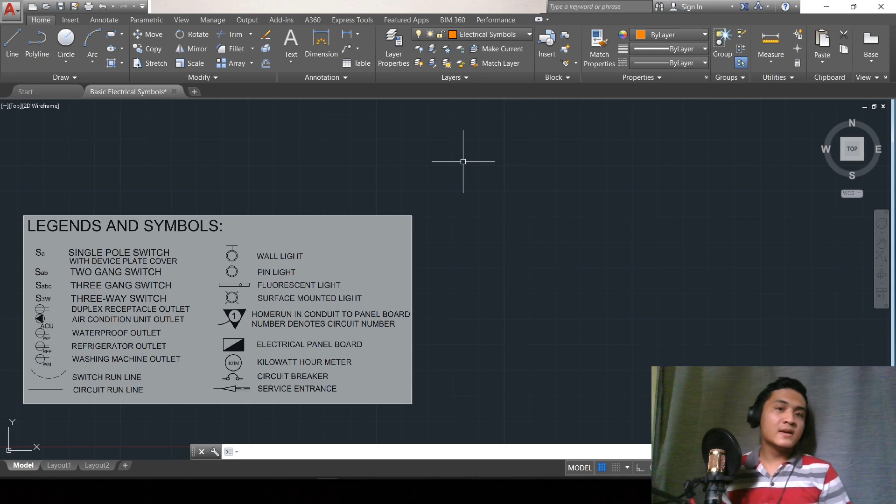In this video we will create basic electrical symbols, as you can see here on our screen. We'll use these symbols to create electrical drawings for our electrical plan. These symbols are my own drawing, so you can use them for your electrical plans if you don't have samples or want to practice making an electrical plan. I'll teach you how to make this from scratch, so let's proceed.

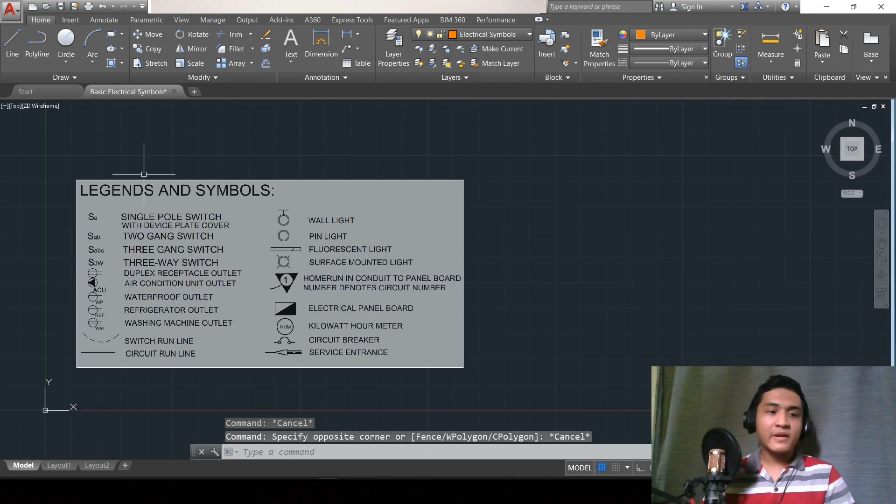Let's proceed with the switches. For the switches, as you can see, the symbol is just text. So for that, I use the text command, or letter T.

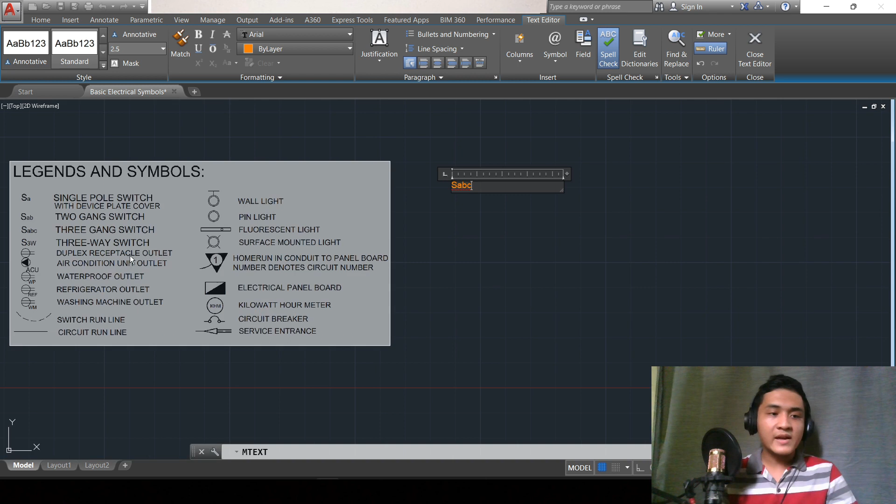Let's click here. The first thing I do is type the capital S, which means switch, then the small letters. We'll use this text for the 3-gang switch. What I do here is select the lowercase text, and after that we change the font size.

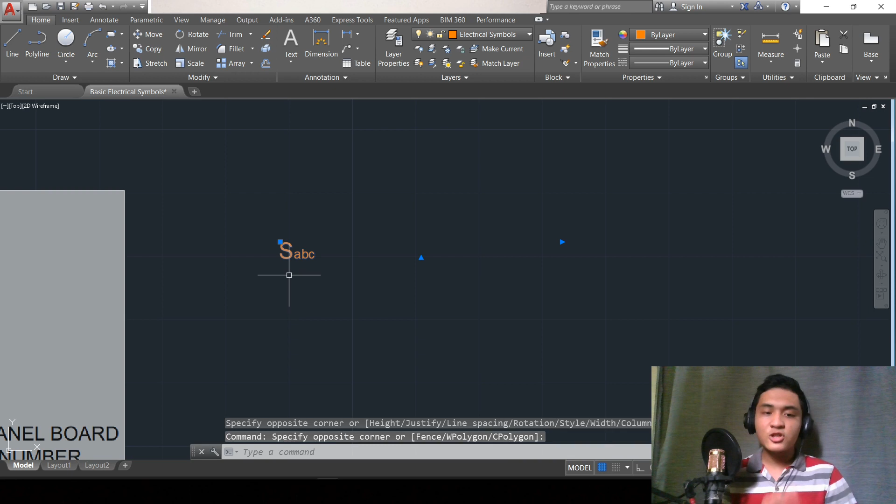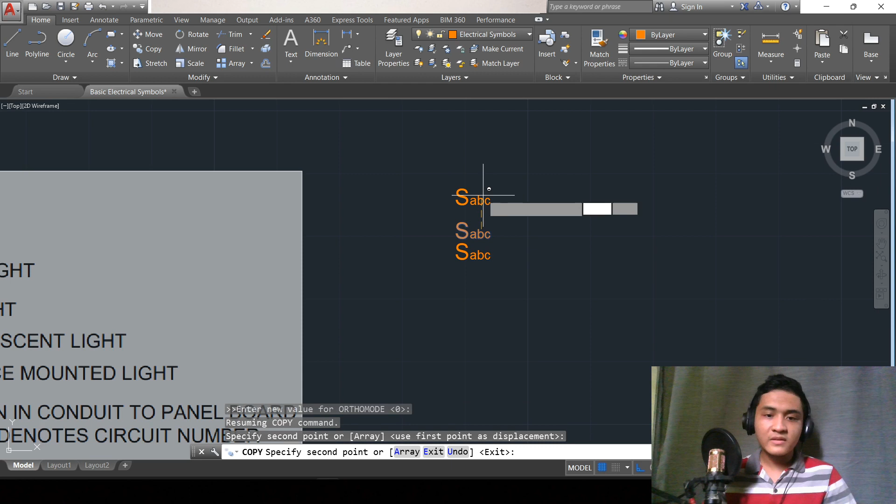When making the other switches, we can just copy this and revise the content of our switches for a while. So let's copy it, and by that let's proceed to the other switches.

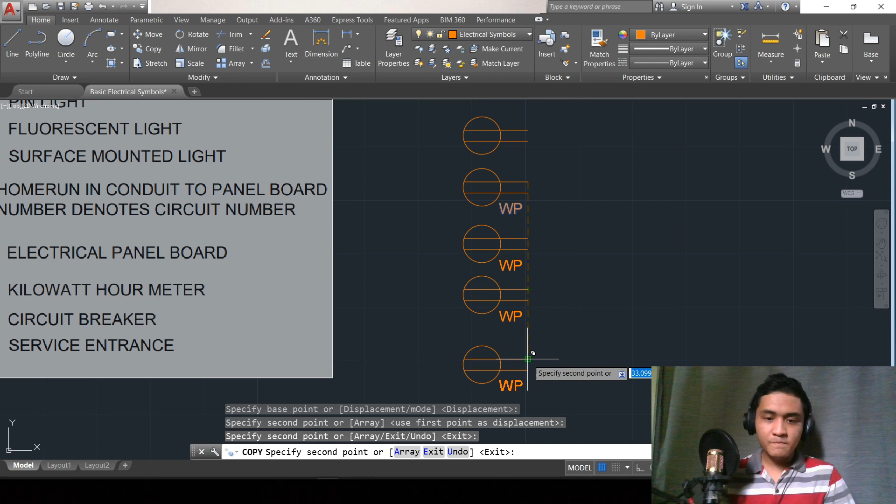Next, what we'll do here is the refrigerator outlet - just REF. There, now we have the refrigerator outlet. For the last one is the washing machine outlet - WM, let's just change the font or the text itself.

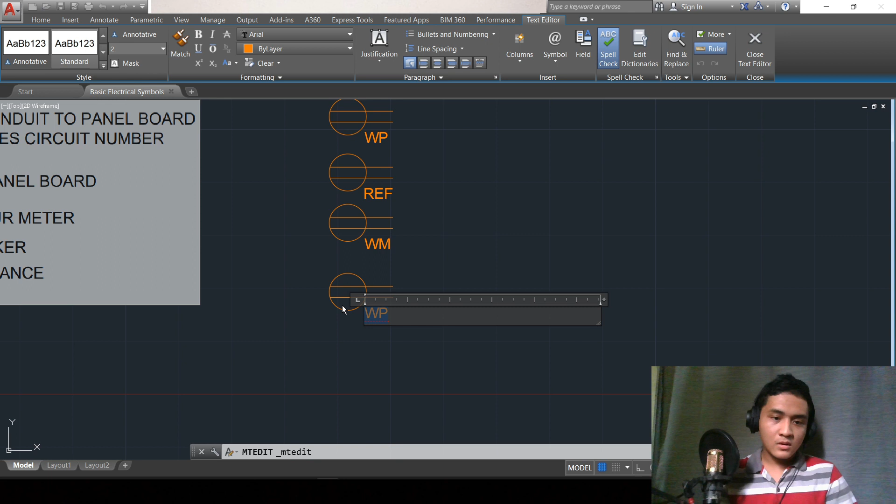So, for the last one is yung air condition unit outlet, for ACU. Ginagamit natin is yung same text, no? So, ACU. And after that, gagawa tayo ng triangle sa loob.

So, for that, I'm going to use the command POL or polygon. Tatanungin tayo kung ilang sides. Triangle ang gagawin natin, so therefore 3 sides. Tatanungin tayo ng center.

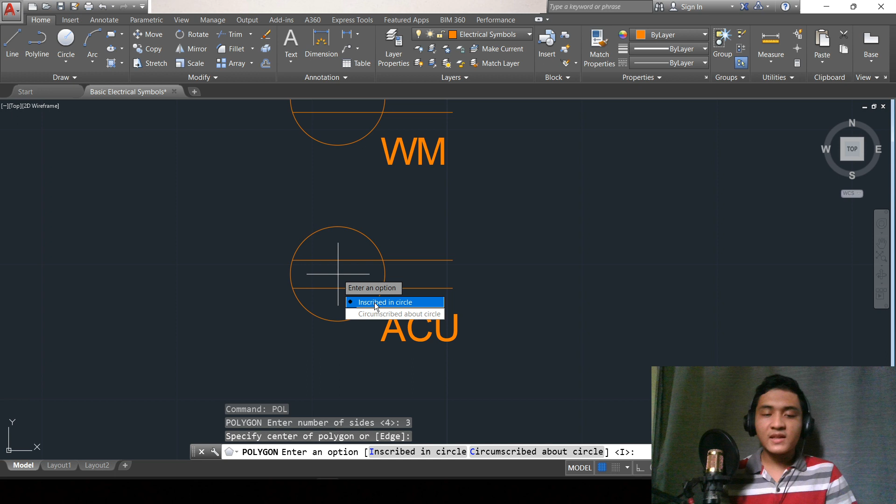For the center, tatanungin tayo kung inscribe or circumscribe. In this case, sa loob yung polygon na gagawin natin, so inscribe. And after that, i-drag natin siya sa kanyang radius. Ayan, kapag dinrag nyo na siya sa radius, nabuo yung ating triangle dito.

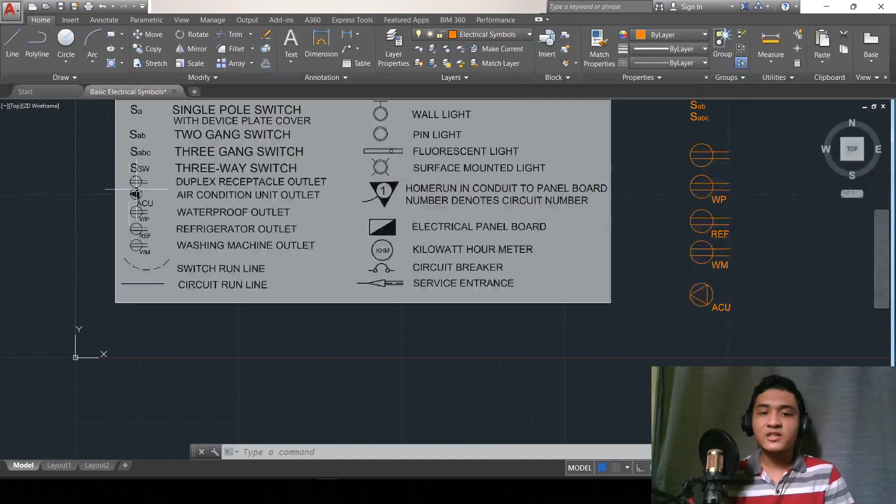At tatanggalin natin yung mga lines na ginawa natin kanina. Mapapansin nyo dito na shaded siya or naka-hatch, so magagamit tayo ng command na hatch. Yung command natin dito is yung H. And after that, mag-hatch tayo dito sa loob.

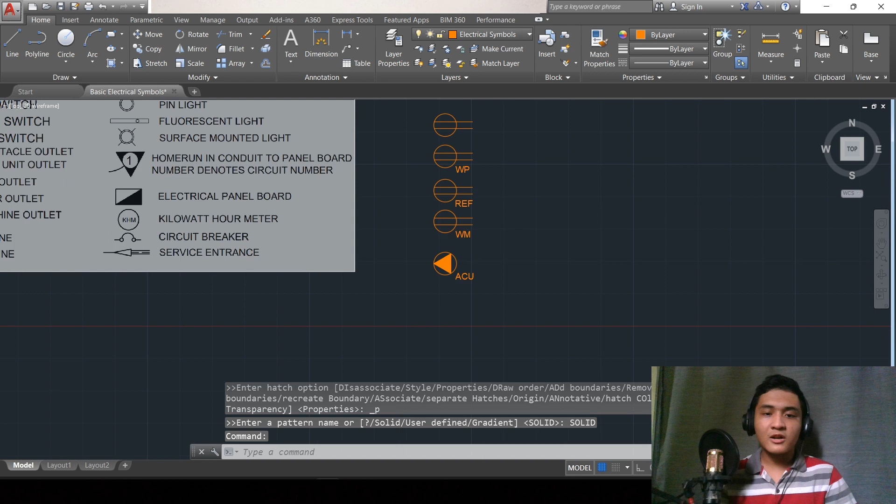Finally, meron na tayo ng mga outlets. Ito na yung mga outlets na ginawa natin dito. Ang susunod naman natin gagawin is yung mga lights. As you can see, meron tayong different types of lights.

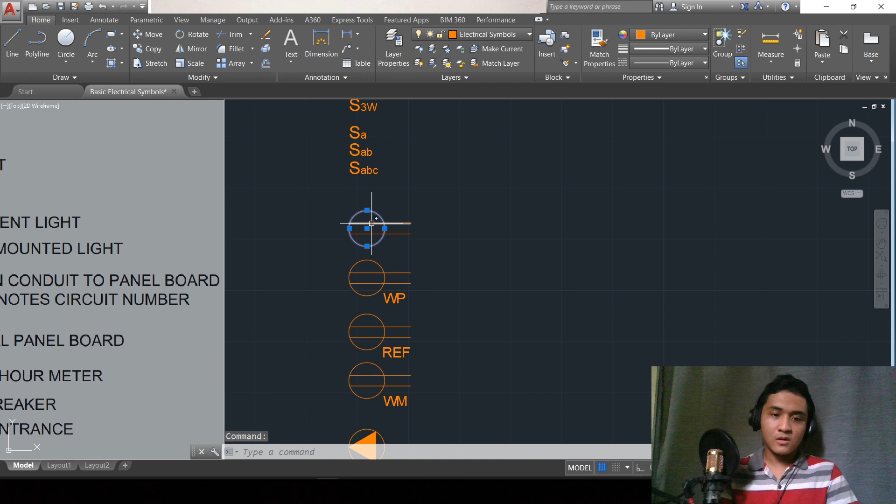Since meron na tayo ng circle, pwede naman natin i-copy na lang to. Gawin tayo ng command na CO or copy. I-copy na lang natin yung mga circle since same lang din naman siguro sila ng measurement.

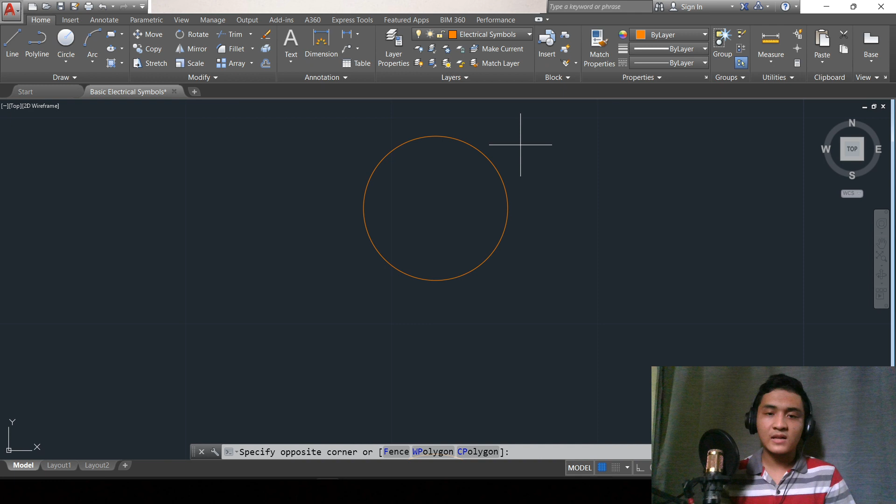Ayan, meron na tayo ng ating lights. So by that, magagawa tayo ng mga other light. Meron siyang circle dito sa loob, so therefore mag-offset na lang tayo. Sa offset, tansyahin nyo na lang kung ano yung size niya.

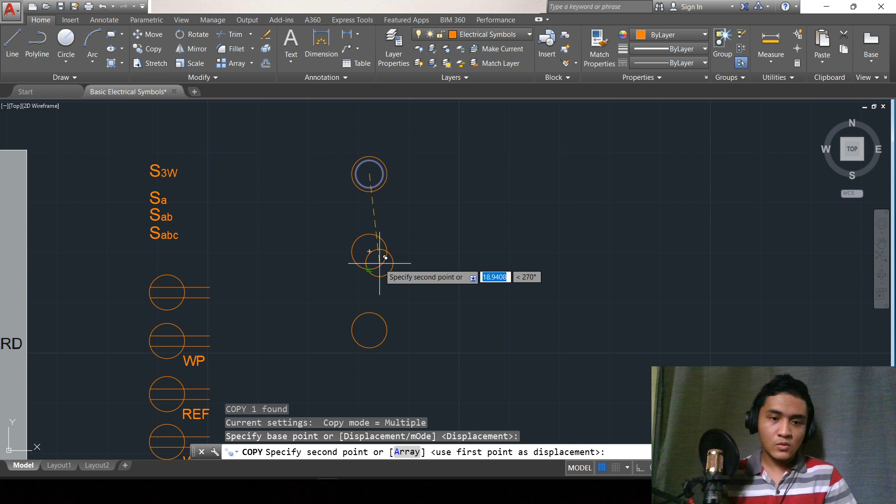Since same lang din naman na meron silang inner circle sa loob, copy na lang natin yung ating circle dito. I use the command CO, or copy, para makopy natin yung circle sa loob. At mapapansin nyo na sa wall light is meron siyang parang line sa taas, at meron siyang vertical sa gitna niya.

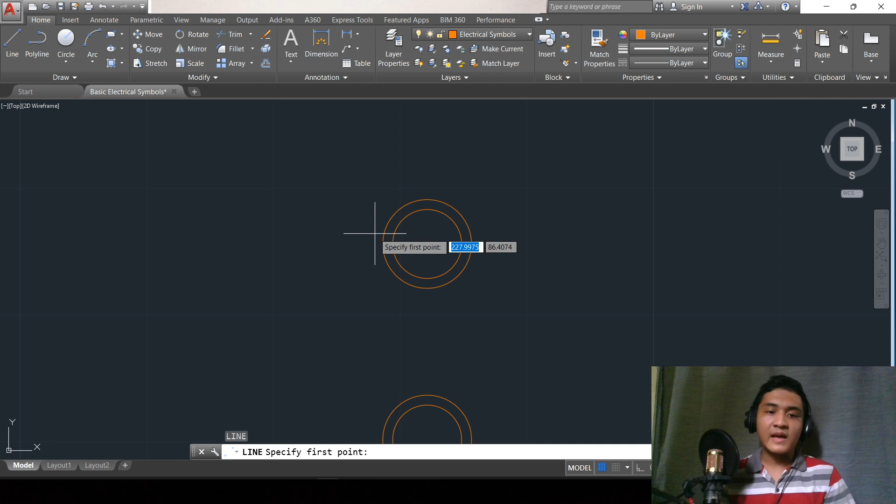So gagawa tayo ng line. Ang line ko dito is sa center. Bakit ko sinabing center? Kasi yung radius ng circle is same lang din sa haba ng line. So therefore pwede natin tong gamitin na guide para gumawa ng ating wall lamp.

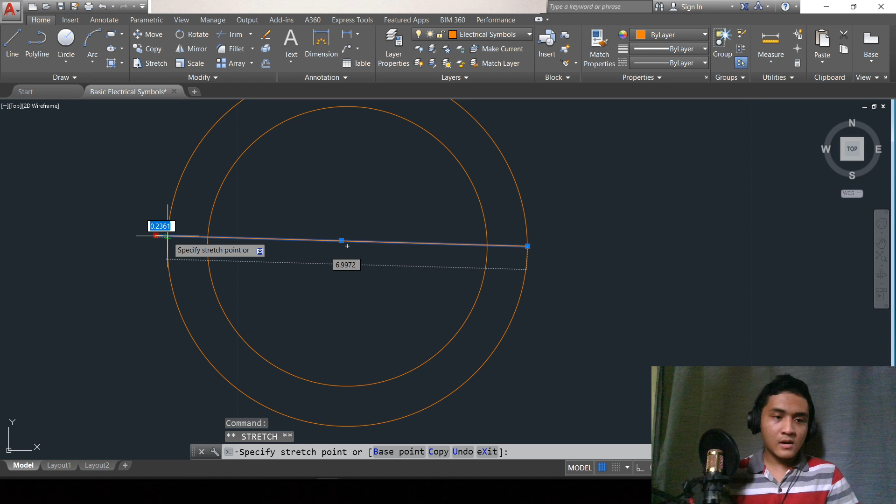At after that, i-move natin siya. Or I guess hindi siya pantay, so ulitin natin. L for line, so dapat pantay ito. Naka siya?

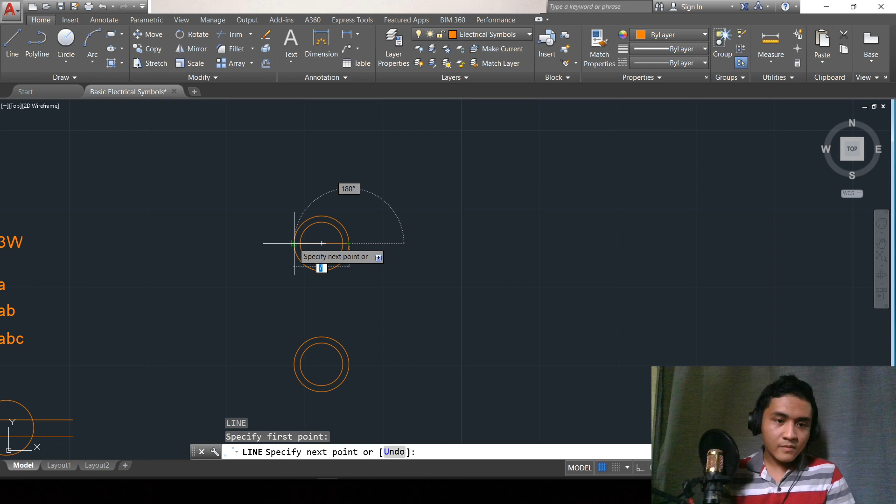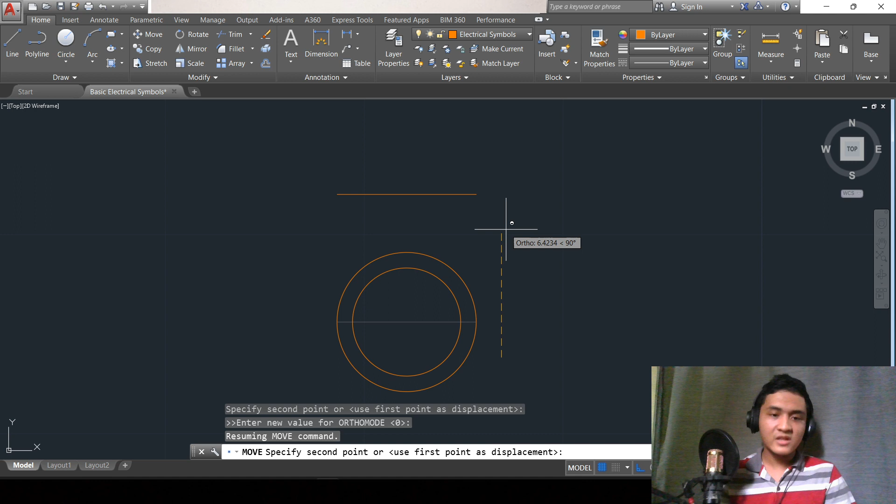Naka-horizontal dapat siya. Susunod naman natin dito ang gagawin is i-move natin siya upward para magkaroon tayo ng parang horizontal line sa taas. Tansyahin nyo na lang, and after that, gagawa tayo ng line dito sa midpoint ng ating ginawang line kanina. At finally, meron na tayo ng ating wall lamp.

Susunod naman natin gagawin dito is yung surface mounted light. Para dito, ginagawa ko is I use the command L for line. Ginagawa ko dito is gumagawa ko nung kalahati ng line.

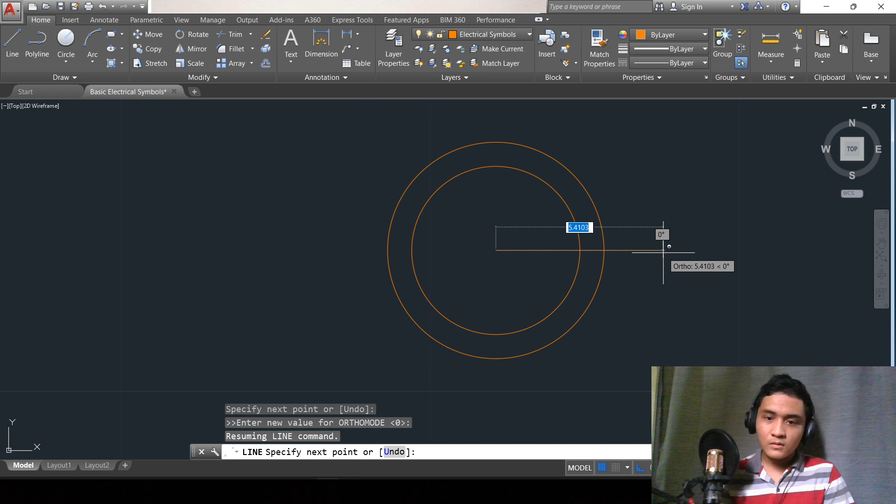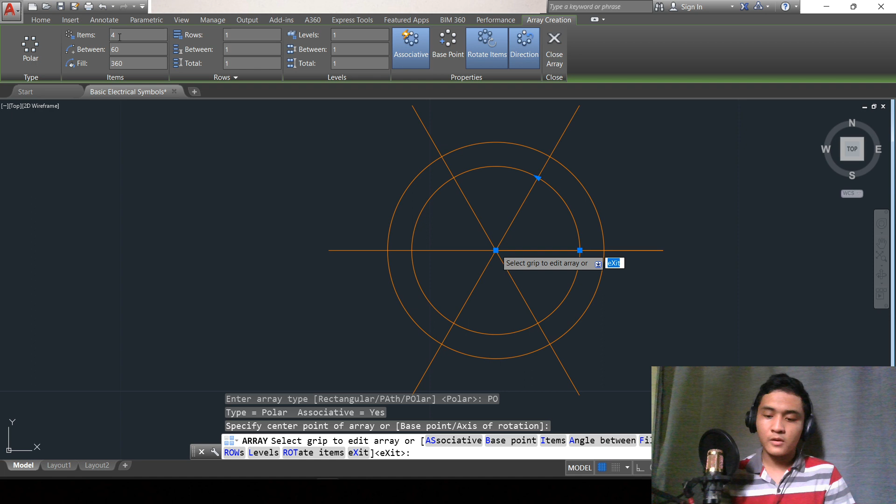Ayan, for example. At after that, ginagawa ko is I use the command AR, so polar, and then gitna. I-type natin items, gagawin natin 4. Yan, so after that, i-rotate ko ito ng 45 degrees.

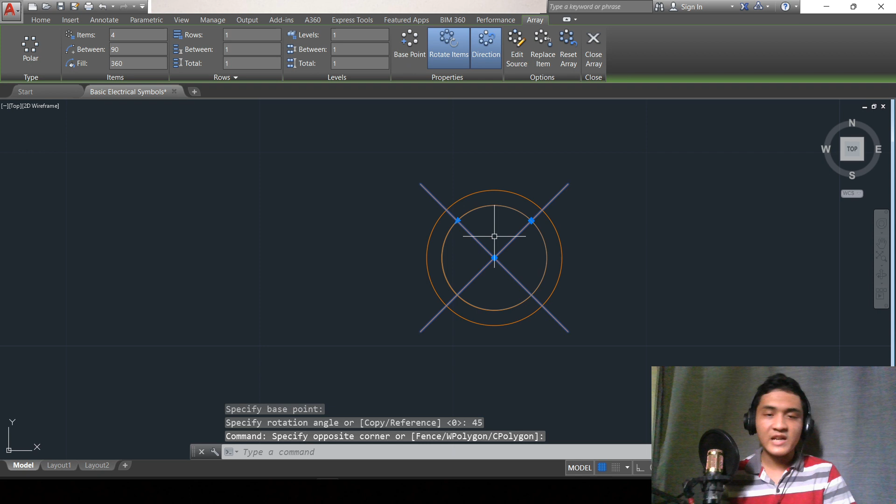I'm going to use the command RO. Click nyo itong gitna, then type nyo is 45. Next na gagawin natin is i-explode natin to, kasi since siya ay naka-array, automatic siyang magiging block. X for explode. At susunod naman natin gagawin dito is yung trimming.

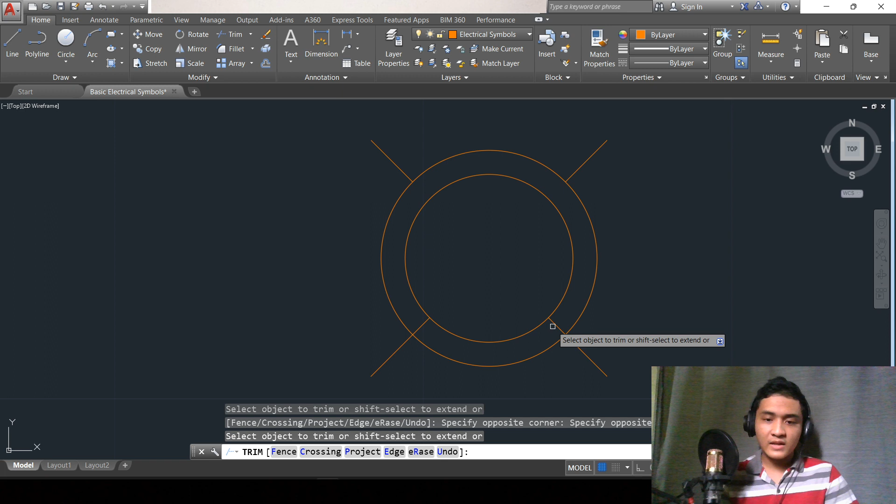Para sa trim, putulin nyo lang yung mga sobra sa loob. At after nyo maputol yung mga sobra dito sa loob ng ating line, mapo-form na natin yung symbol for the surface mounted light. Ayan, meron na tayo ng surface mounted light.

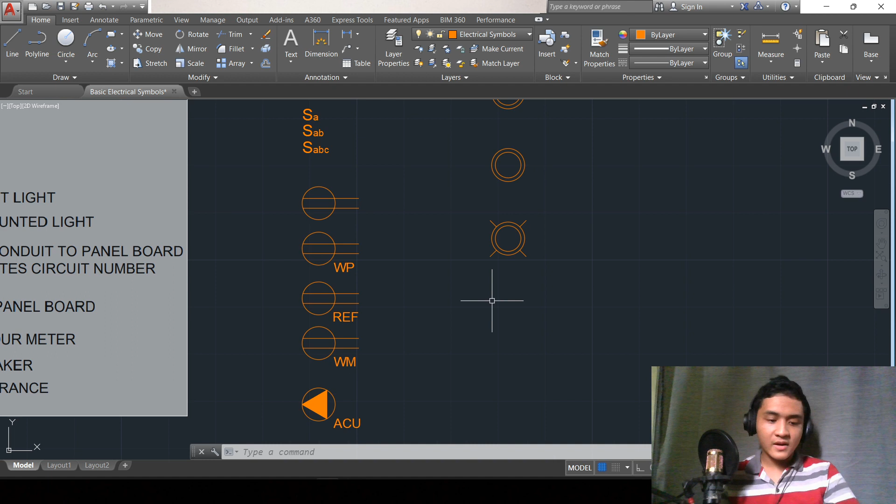Ang susunod naman natin gagawin is yung fluorescent light. Para dito, rectangle lang siya and then circle. I'm going to use the command REC or rectangle. Tansyahin nyo na lang yung haba ng ating rectangle. At after that, gagawa tayo ng circle sa loob. Para sa circle, tansyahin nyo na lang din kasi wala namang standard size niyan sa pag-drawing.

Kapag naman ilalagay nyo siya sa floor plan is mag-scale naman kayo para mag-fit siya doon sa ating electrical plan. As you can see, meron na tayo ng ating fluorescent light. So for the light, tapos na tayo.

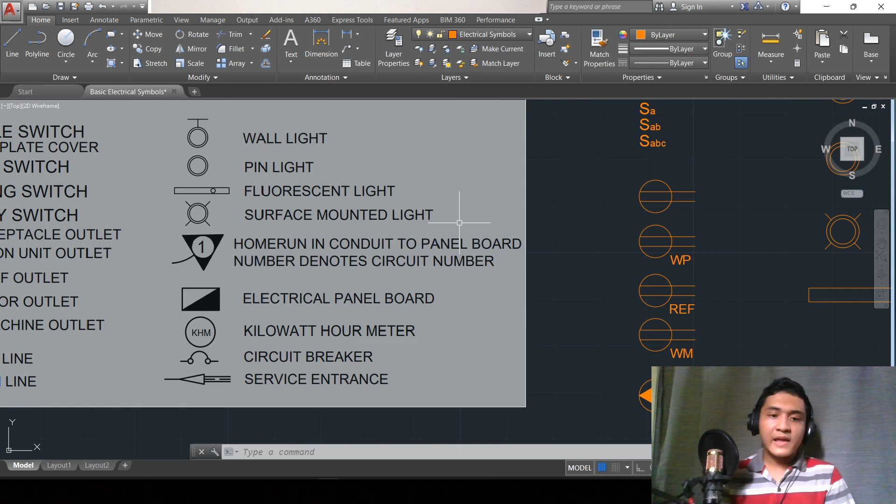Dito na lang tayo sa last 5 drawings. So by that, let's proceed muna dito sa service entrance. Para dito, meron siyang triangle, tatlong line, at merong gitnang line.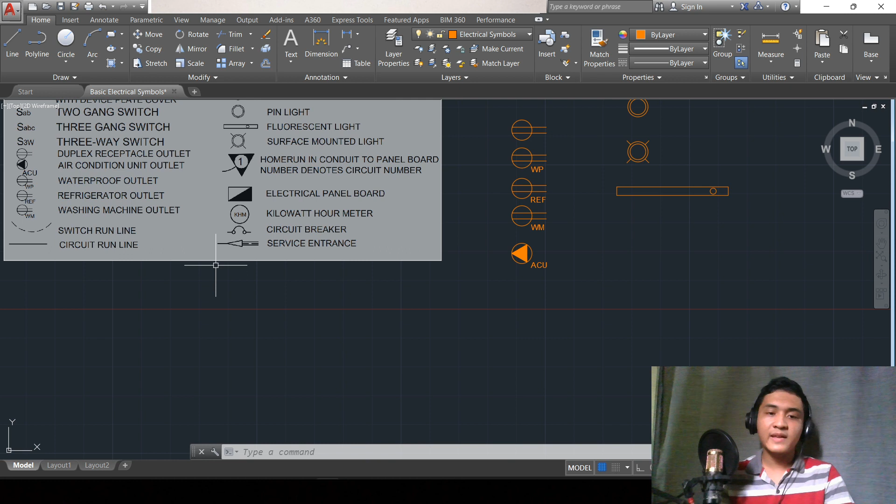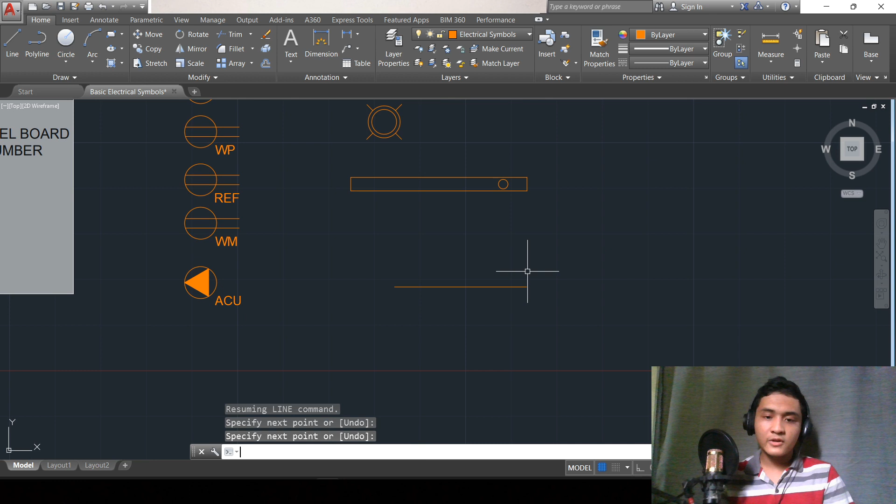So by that, gagawin natin siya with the help of line commands. For the line, L, so let's proceed. Ginagawa ko, I start with a horizontal line. At after that, tatansyahin nyo na lang yung offsets niya.

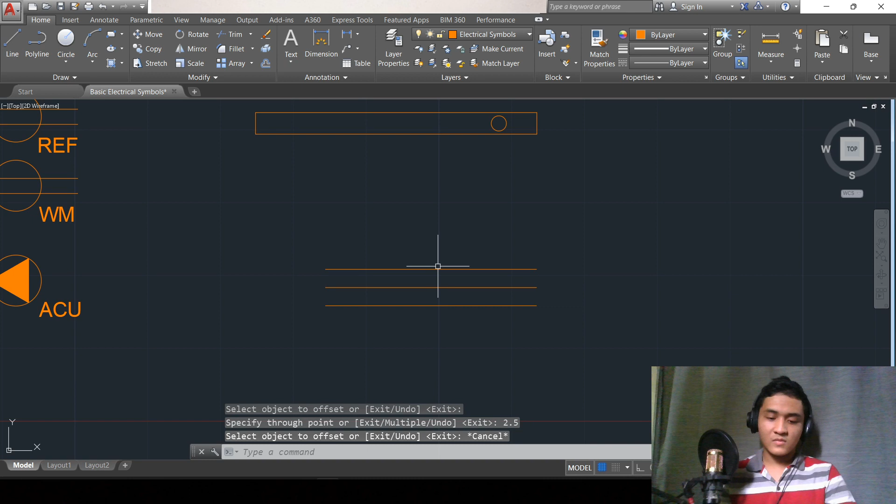Siguro, pwede natin gamitin is 2.5. At after that, gagawa ko ng line, so for the line, is yung gitna nila.

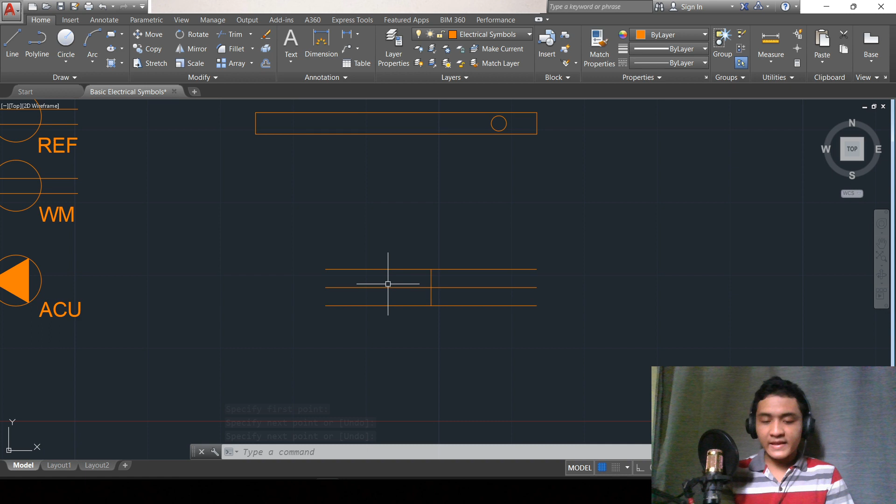So for the next one is yung kanilang tinatawag nating diagonal lines. Para doon, gagawa ko ng diagonal lines dito para makapag-form tayo ng ating triangle.

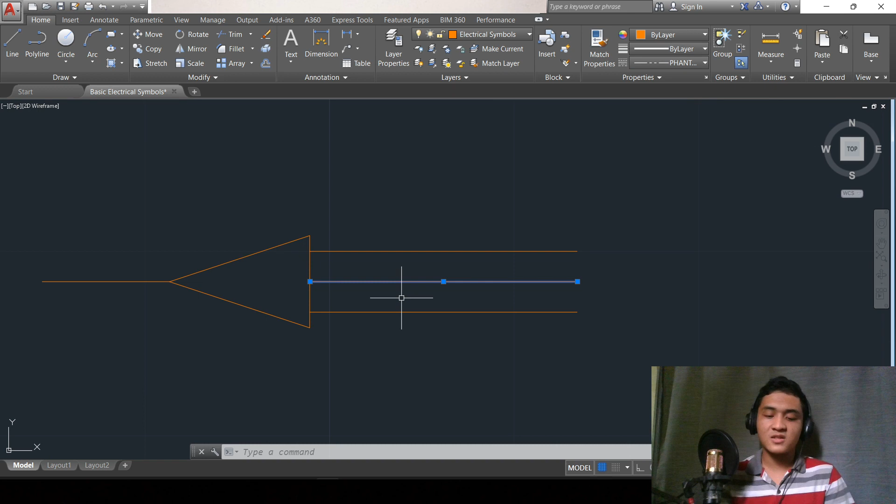So MO for properties, then let's proceed to the line type scale. We can select the line and change its line type scale. Let's try reducing it to 0.25.

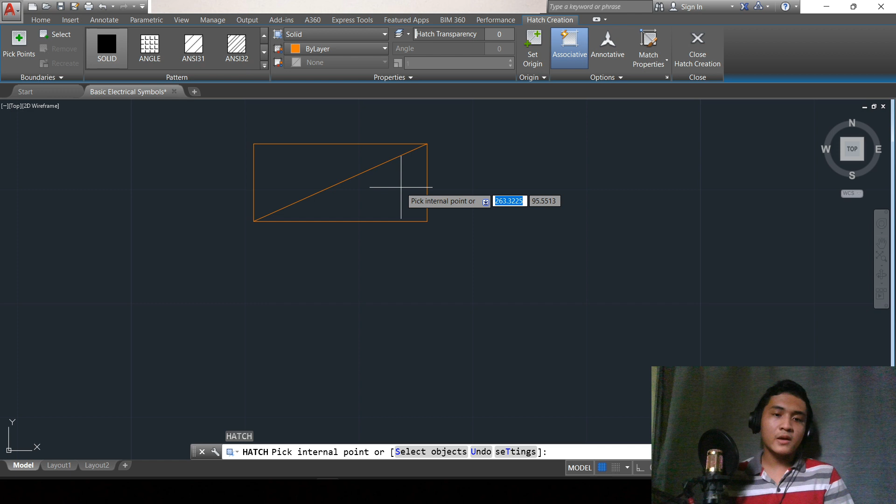After that, a diagonal line, finding the corner to corner. Then after that, let's use the hatch command. For the electrical plan or symbol of this panel board, only one part should be hatched. Okay, so once I click this, we now have our electrical panel board symbol.

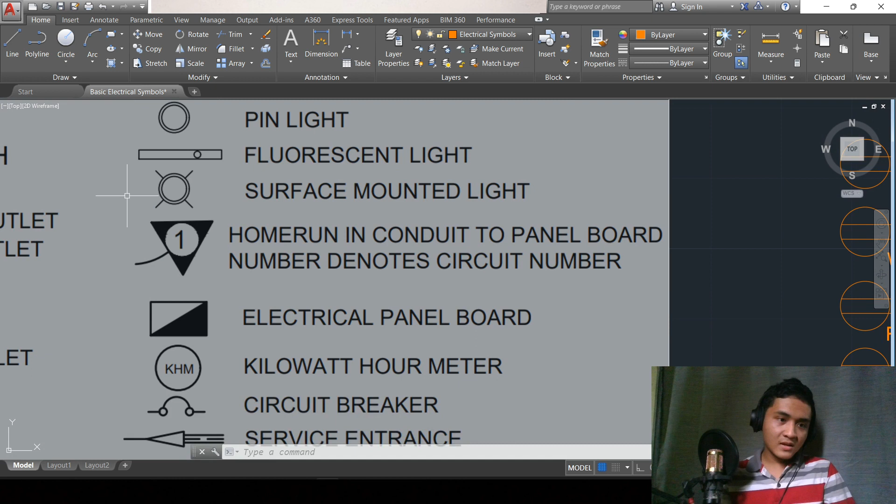Next, what we'll do here is the home run circuit number. For that, you'll see we have a polygon triangle and then a circle. So let's get the circle here.

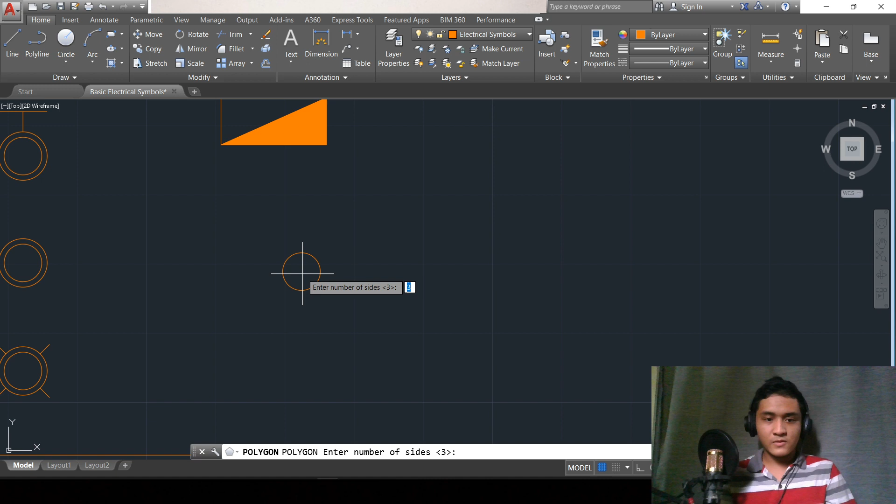So this is the circle. And after that, we use the polygon command. For the polygon, still three sides, so enter, center, and in this case it's circumscribed since it's outside the circle.

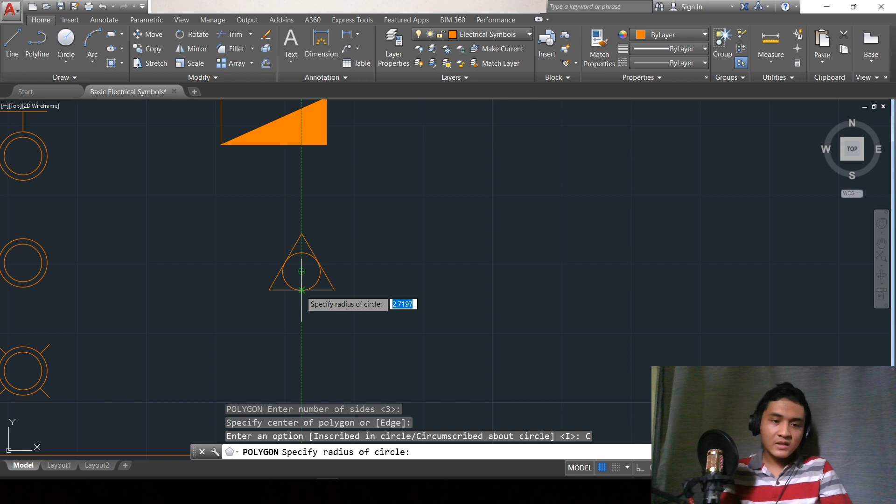So by that, touch it from center up to the outside of this circle. After that, we can rotate it, and the center is the circle.

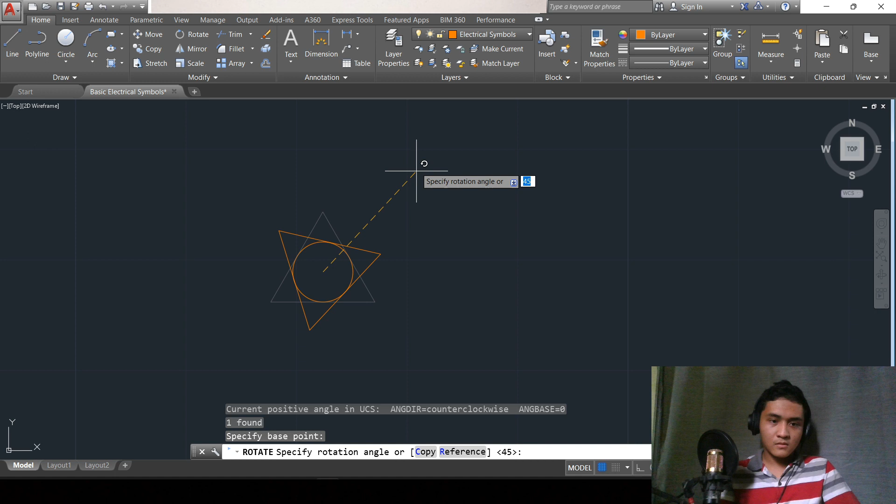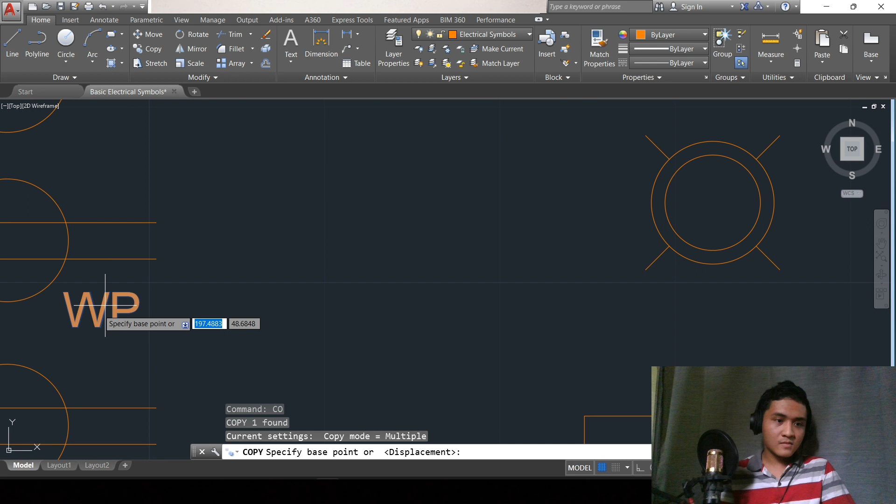And after that, I can use the command A for arc. And then text - for the text, we can just estimate it, no problem, as long as we can make the symbol, that's the important part in making our electrical symbols. Okay, so let's make this number 1.

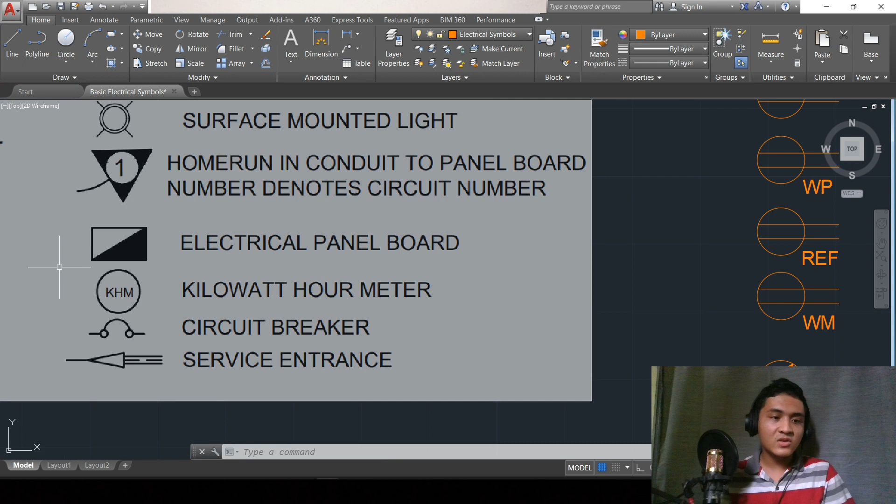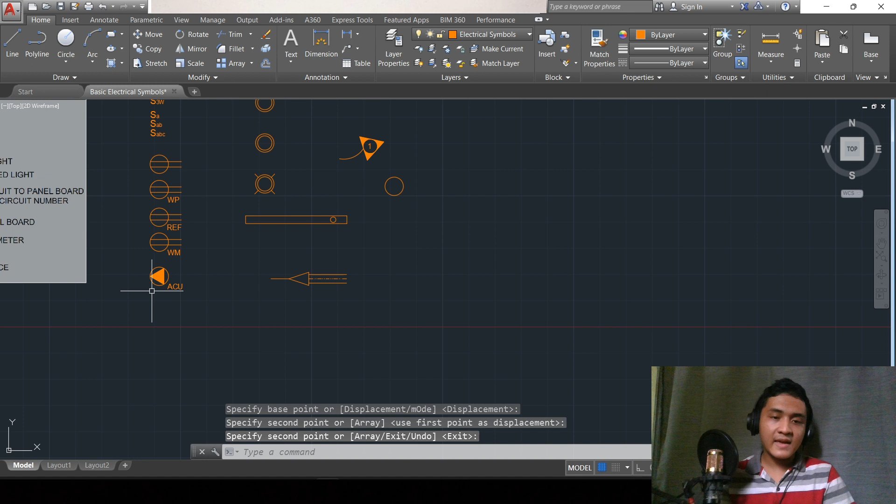So two things left to do, which is the kilowatt hour meter and then the circuit breaker. For the kilowatt hour meter, let's just copy the circle since they're the same. For that, I can use the CO or copy command. Here we'll make the KHM symbol, so let's just copy it here.

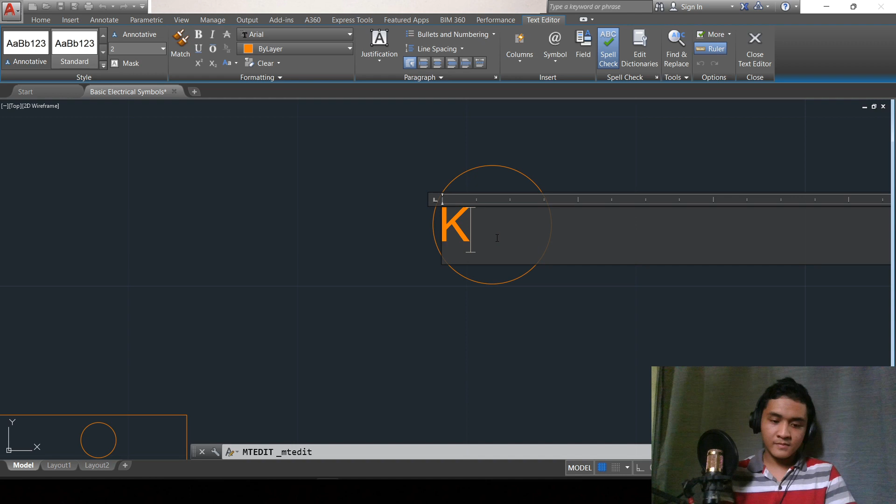And finally, let's just make the circuit breaker symbol. For the circuit breaker symbol, three commands we'll use for drawing this, which is line, circle, and then arc. So let's proceed, for the L we can just estimate it.

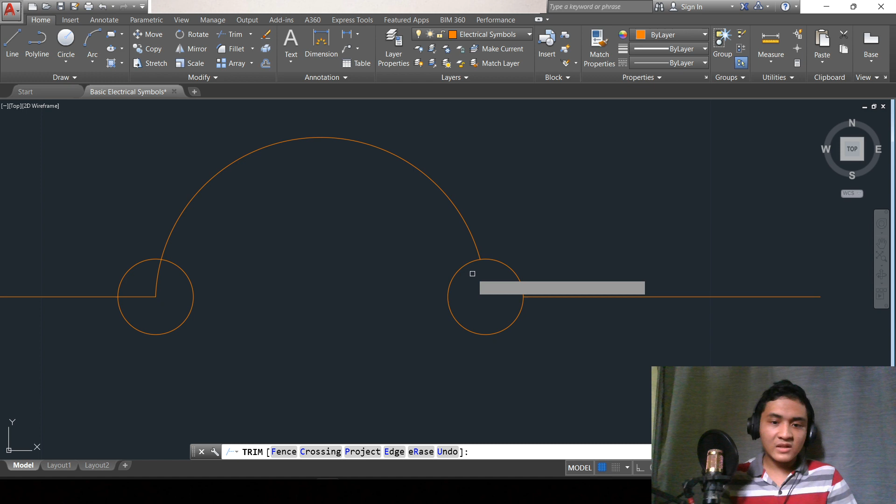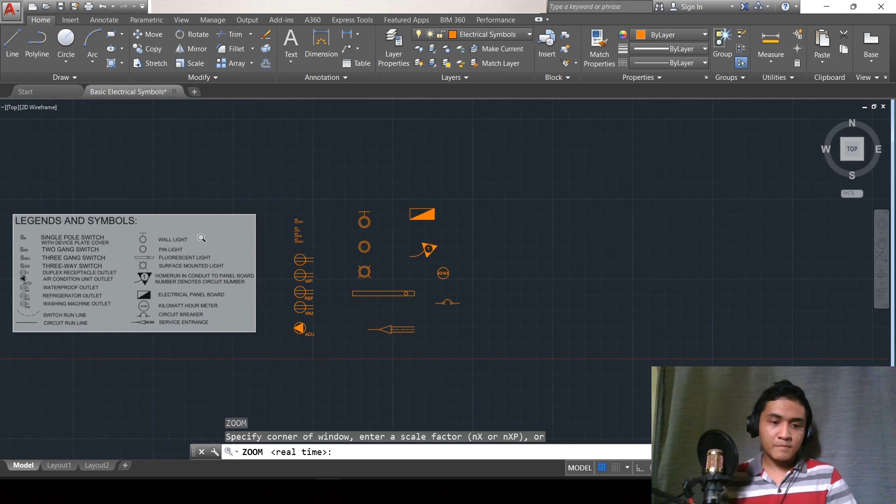And finally, we've completed the basic electrical symbols with the help of the basic commands we used. Okay, so thank you so much guys for watching this video, and I hope you learned how to make electrical symbols, and I hope to see you in the next video.